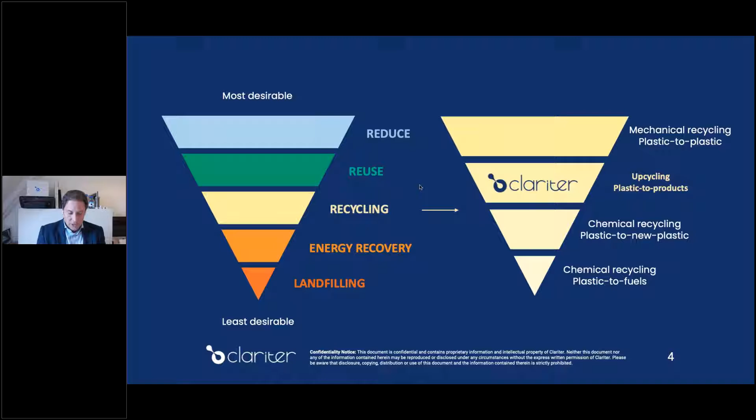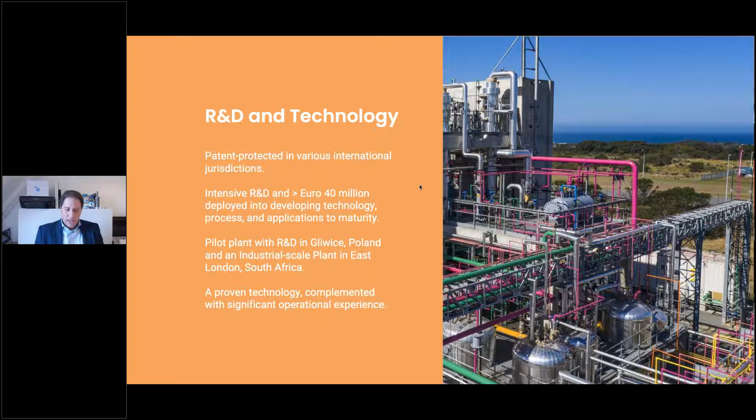Here we transform the plastic waste via a three-step process. First, we thermal crack it. Then we have a unique hydrorefinery process in which the pyrolysis oil is refined based on hydrogen, taking out the double bonds, the sulfurs, the aromatics, all the impurities. After that we distill it and separate it into three product families: solvents, oils, and waxes.

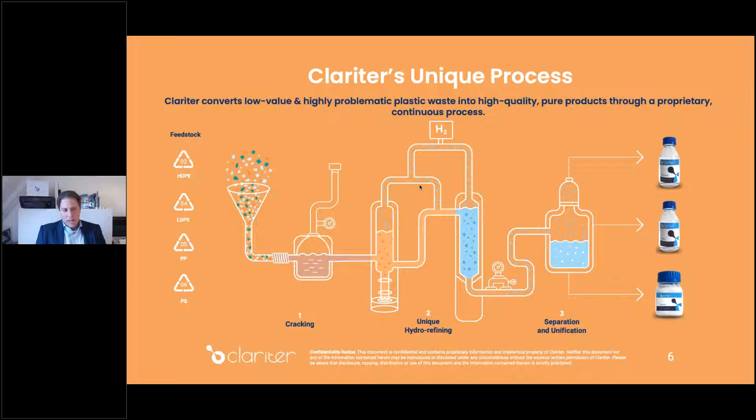This unique process creates products of the greatest, highest purity that can be used in numerous applications, whether it's shoe cream, lamp oil, surf wax—you name it. The opportunities are endless, because with high purity we achieve a 100% drop-in.

We create a 100% drop-in that can replace crude-based oil products, our incumbents for these products, making it much more sustainable. So all the products you see here in front of me, and behind me as well, are made out of plastic waste—upcycled plastic waste into these chemical products.

Our products have been tested over and over again. They meet FDA purity levels. We have reached registration in Europe, and currently, as you saw, with our pilot scale plant in South Africa, we're up for the next big phase in our existence: our full-scale plants.

We envision these first off in the Netherlands, Poland, and Israel. There we will process 60,000 tons of plastic waste and turn that into our beautiful product, yielding 50,000 tons. So basically we have a yield of 85%, which is very high in this field of work.

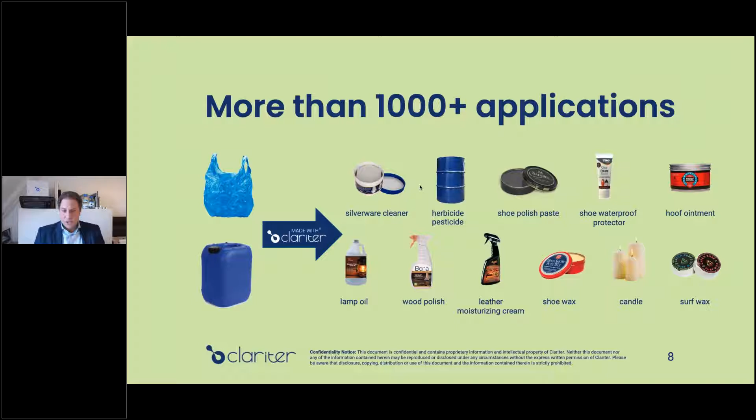And this all is a unique proposition we're very proud of.

As the Clariter family, I can tell you we are a very international company. I'm talking to you here from the Netherlands, but we have an R&D team in Poland, our team in Israel, and a team in South Africa. It's all patented, and we're always open for new partners, investigating new solutions and applications, and for people interested in joining us in our next steps for our full-scale plant.

So that's very short what we do, and again, we're very proud to be here as a finalist. Thank you for your attention. Thank you, Jasper.

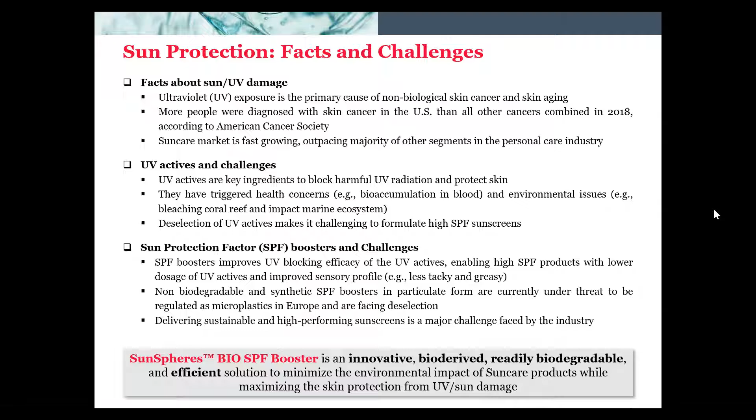Towards that, we developed this new product called the Bio SPF Booster. It is bio-derived from wood pulp, using a patented technology from wood hydrolysis. The wood is responsibly harvested. It has 100% renewable carbon, and is derived natural according to ISO 16128, with a natural origin index of 0.97. It is also readily biodegradable, confirmed by the OECD 301F test. This product has also been recognized by a few global awards, as you can see here.

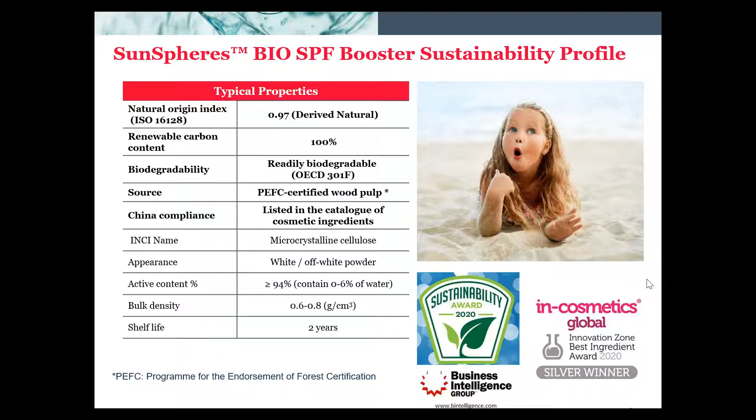Now, how it works. The scattering mechanism is through UV scattering. If you look at the illustration here, the scattering can increase the optical path length of those harmful UV light in the sunscreen film, which is acting as a protection film on our skin. And then it increases the probability of those harmful UV radiation being absorbed or consumed by the UV actives.

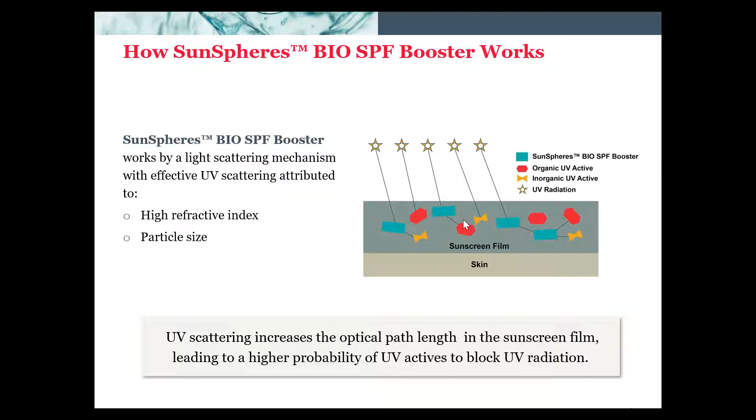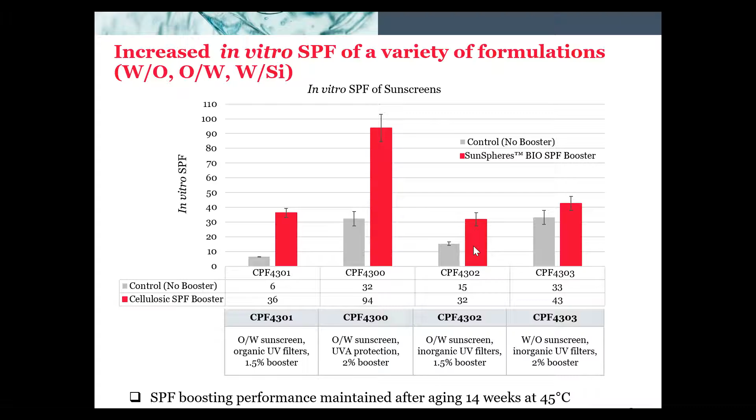We also did the in vivo test, done by a third party, directly testing on human body according to the FDA protocol. You can still see that this product in one of those formulation chassis doubled the boost efficiency of the leading synthetic benchmark. And that allows anywhere from 30 to 40% reduction of UV filters by only using 1% of this sustainable SPF booster.

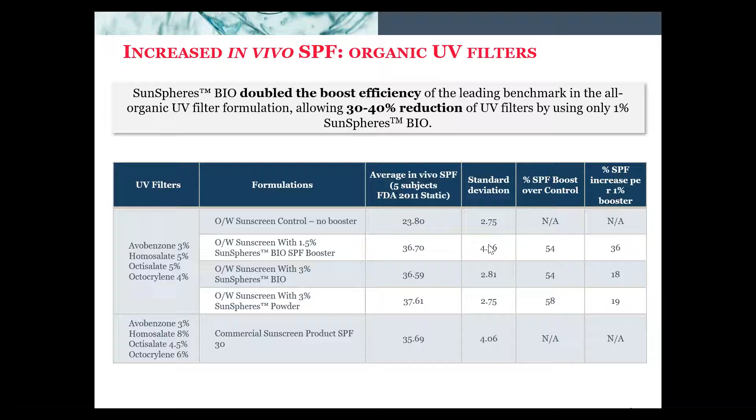And we also tested it in a different formulation, tested with all inorganic UV actives zinc oxide and titanium dioxide. If you look at the label at the back of the sunscreen bottle, again, we see a very significant boost of this product.

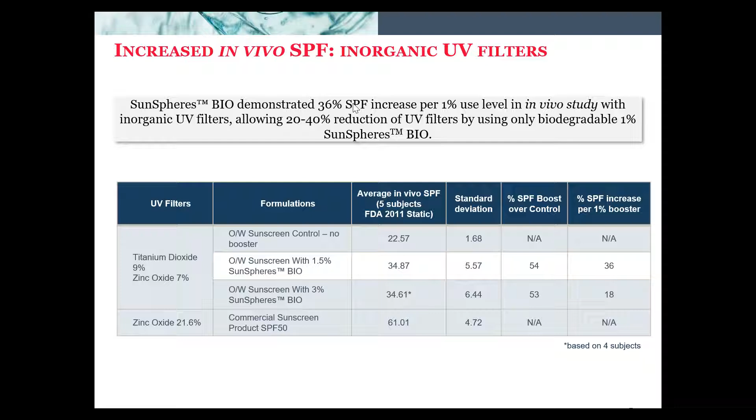One of the kind of drawbacks of sunscreen that discourages consumers from applying it to the skin is the sensory experience. This product shows to improve the sensorial profile of the sunscreen, making it less tacky and less greasy. This will help the consumer appeal as well.

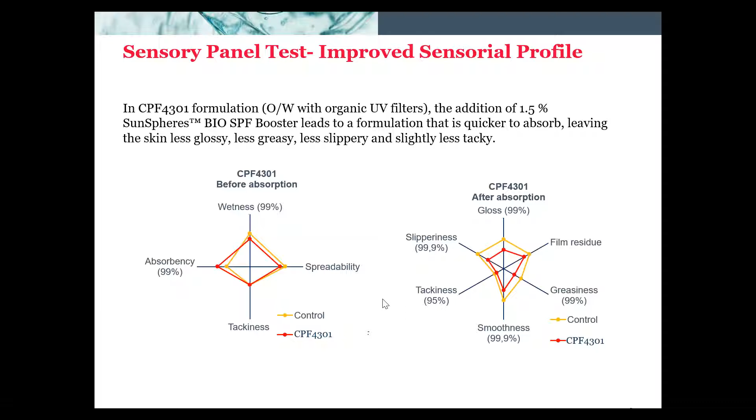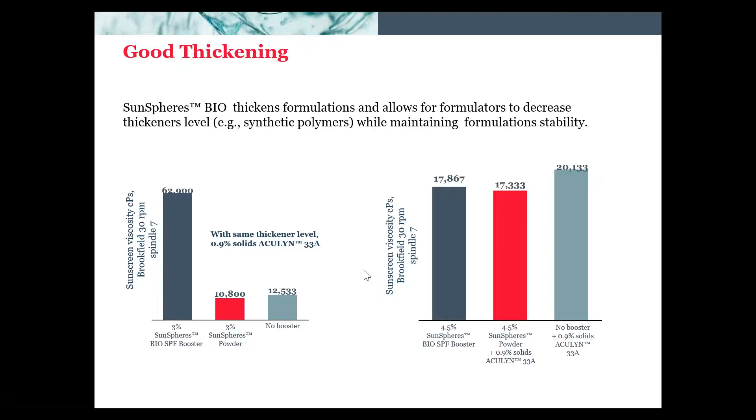In addition to the SPF boosting, this product also can thicken the water. This is an additional, added benefit compared to other SPF boosters. This allows this product to act as a rheology modifier and replace some of the synthetic or non-sustainable rheology modifiers in sun care products as well, like a 2-in-1 kind of product.

It was also found to have very superior shear thinning, as you can see here. There's a lot of technical detail I won't go into, but shear thinning is highly wanted in any consumer lotion-type application. It enables good spreadability and good sprayability through a pump spray.

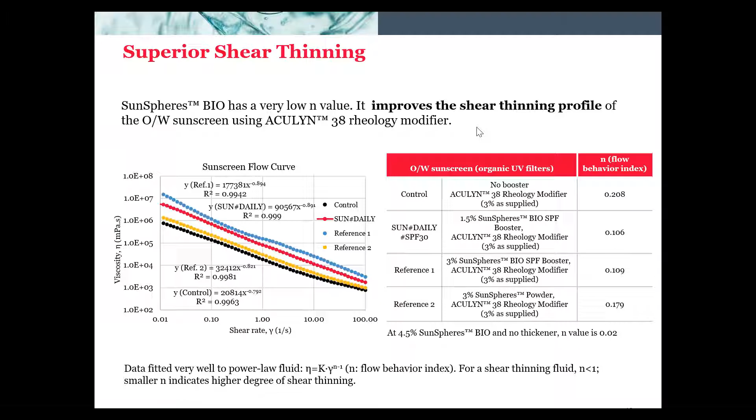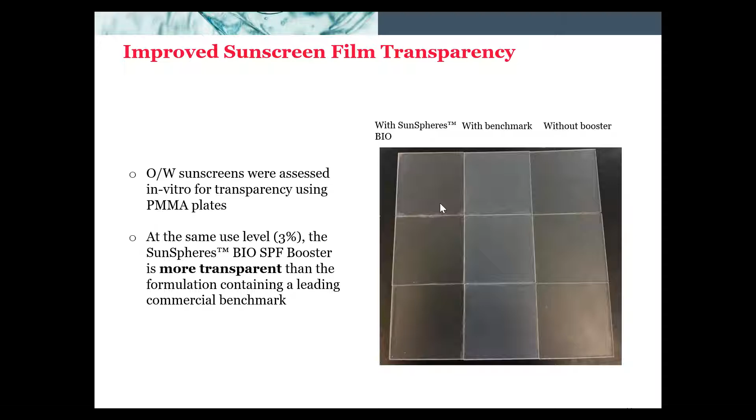Again, the last one is - usually with sunscreens, people don't want to look white after you put it on. So this product enables a transparent film on the skin.

So overall, this is a crystalline cellulose-based technology that has high performance and multifunction. It not only enables higher sun protection to help reduce non-melanoma skin cancer and skin aging, but also reduces the environmental and health impact of the sun care product overall.

And so with all that, I'd love to have you answer questions.

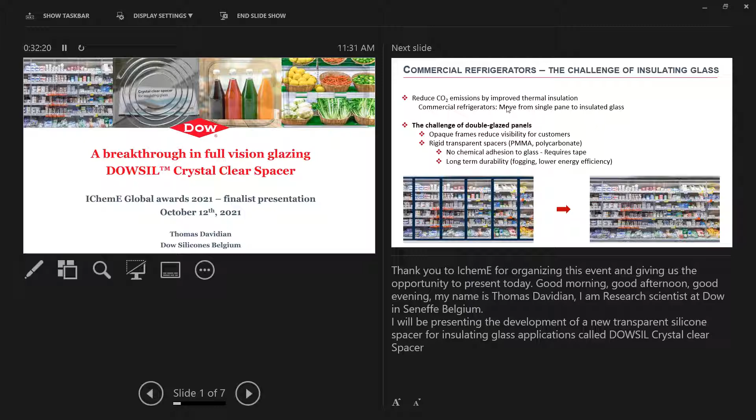Hello, good morning, this is Thomas. Can you see my full screen mode? I think, Thomas, you need to go to the top left of your screen and change the display settings. Yes, that's better now. Is it okay now? Yes, thank you. Okay, thank you, Mara.

Well, thank you to IChemE for organizing this event and giving us the opportunity to present today. Good morning, good afternoon, good evening to all. My name is Thomas Davidian. I am a research scientist at Dow in Seneffe in Belgium. I will be presenting the development of a new transparent silicone spacer for insulating glass applications, called Dowsil Crystal Clear Spacer.

In order to increase thermal efficiency and reduce CO2 emissions, supermarkets and retail stores look for improvements in the insulation of their commercial fridges. For some years now, supermarkets have equipped their fridges with single-pane plexiglass doors. However, the next step of thermal efficiency, meaning going to double glazed panels, shows some technical challenges. For supermarkets, it is critical to maintain full vision for the customer to see the goods, so opaque frames in aluminum or PVC cannot be used.

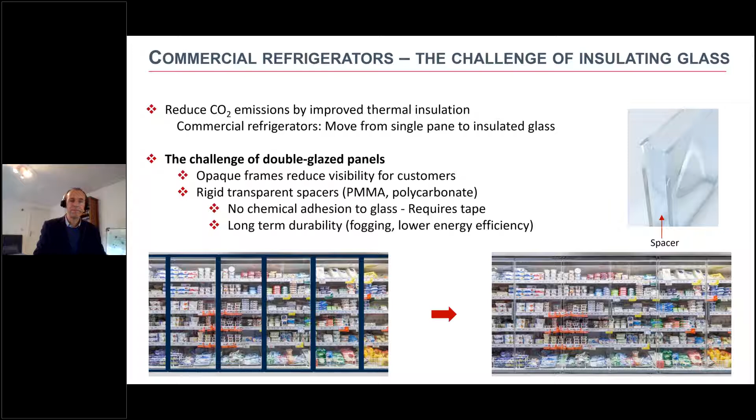Our team at Dow has developed a silicone spacer based on a novel two-part condensation cure chemistry. The formulation was optimized by balancing key properties such as transparency, hardness, elasticity, and adhesion to glass. Formulations were scaled up, and an on-purpose spacer production process was developed. This allowed us to sample customers with pre-shaped spacers and optimize the formulation based on their feedback.

Eventually, a two-component formulation called DOWSIL 2255, Part A and Part B, was selected. The resulting cured material is crystal clear with durable transparency. This new chemistry provides a unique property of chemical adhesion to glass, even when the spacer is fully cured. As you can see in the picture on the bottom left, there is strong adhesion of the spacer to the glass panes, also showing the good flexibility of the spacer.

Moreover, the lower thermal conductivity of the silicone material enables up to 4% improved thermal efficiency over doors made with PMMA spacers. Both the formulation and the production process have been patented for a robust insulating glass solution.

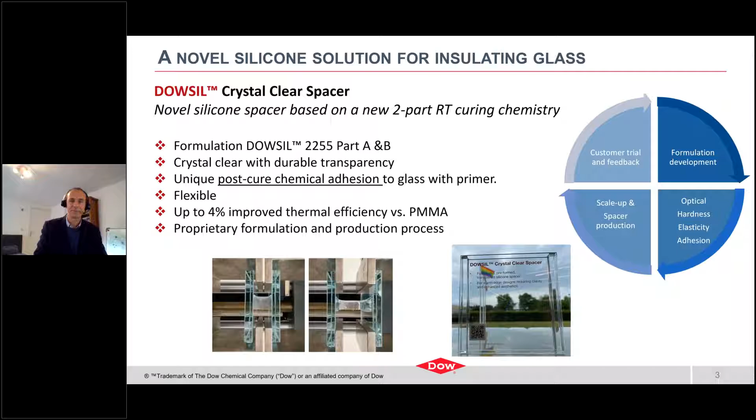The assembly process of the insulating glass units with our spacers is pretty straightforward. First, the glass panel needs to be cleaned and primed with the recommended primer, and left for 5 minutes for the primer to react with the glass. After that, the silicone spacer can be placed onto the glass on both sides and covered by the other pane. After 5 minutes, the spacer is chemically bonded to the glass. Eventually, a secondary seal can be added and the assembled panel can be moved to storage.

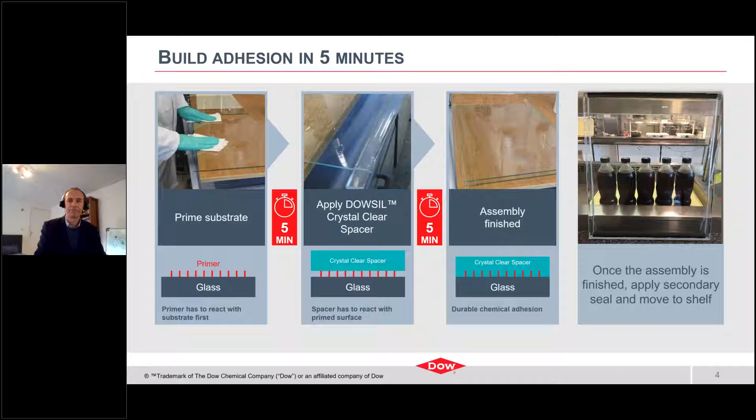The DOWSIL Crystal Clear Spacer is intended for air-filled insulating applications in commercial fridges. Its flexibility also allows the design of curved shapes for specific applications. The picture on the right shows a fridge in a supermarket equipped with our spacers, used to demonstrate the durability of the silicone solution. After several years in service, no loss of adhesion or fogging has been observed.

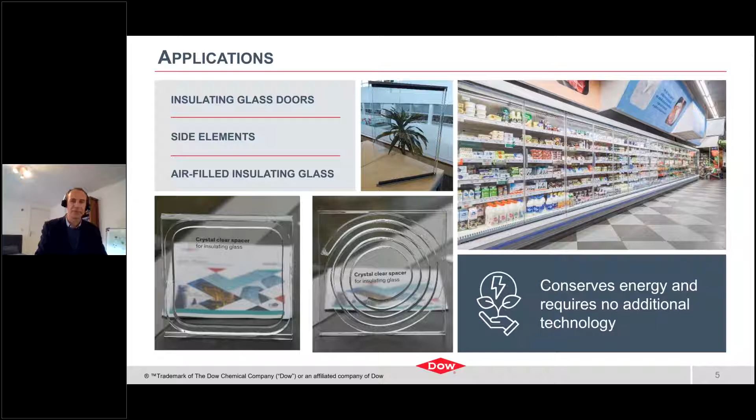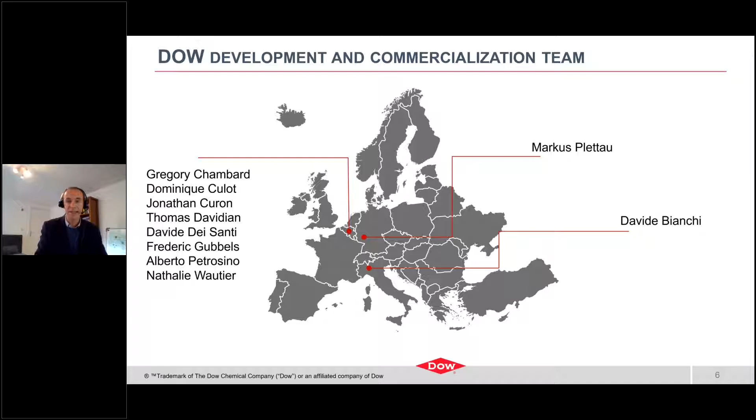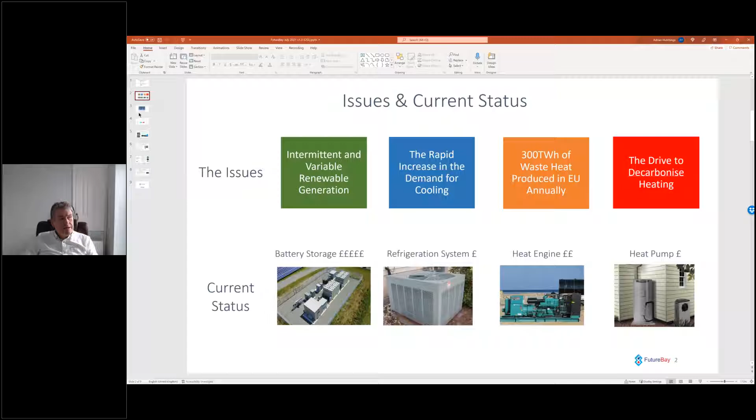There's also a drive to decarbonize heating, and almost as a side benefit of our system, we can provide space heating and domestic hot water. So the system we have produced, the FutureBay unit, can deliver long duration energy storage at quite low costs.

We can deliver waste heat to power, and we can deliver cooling and heating all from a single system, which is based on well understood refrigeration type equipment for easy installation, operation and maintenance.

So this system will not only enable us to shift loads from peak requirement times to off-peak times, and allow us to use renewable energy when wind isn't blowing or the sun isn't shining, but we can also reduce energy consumption for the provision of cooling and heating, and we can do it in a very inherently safe, non-toxic and environmentally benign manner.

So let's talk about this new cycle. This is patented—we have 2 patent families covering over 100 inventive steps, and those patents have now been granted on a global basis. At the center of the system, we have a heat pump, which is energized by low-cost off-peak renewable energy.

And that creates two thermal stores. Effectively, the same as any heat pump, you're moving heat from one side to the other. So we create a cold store in water and we create a hot store in water.

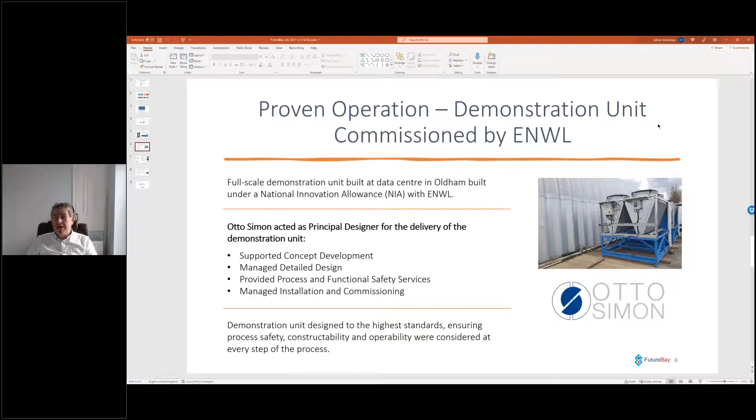I won't speak for Otto Simon - this is their background, they are a highly professional, very skillful team. What I would say about them from the customer side is they're extremely good at communicating, both reactively and proactively, which is great - you don't have to wait to find out what's happening. But I think the other thing that's been really surprising for us is that they're extremely passionate about this project. They believe, as we do, in the benefits it can bring and the importance of it, and that passion comes across in the work they do with us.

The project, as I say, was very successful. This is extracts from a report that Electricity North West made to Ofgem on completion. What we can see here is that we can reduce net electricity consumption as we take the heat that would have been wasted. We reduce CO2 emissions by using electricity that would be produced at night time with lower CO2 burden, and we reduce peaks on their network by producing power that would have normally been used during peak time.

We could effectively reduce, in this particular application, the air conditioning consumption by up to 50%. And we shifted the load off their network, which was extremely important to them, by 150%, because we took the load that would have been used during peak hours and shifted it to off-peak, and we produced electricity during that peak time as we delivered the cooling.

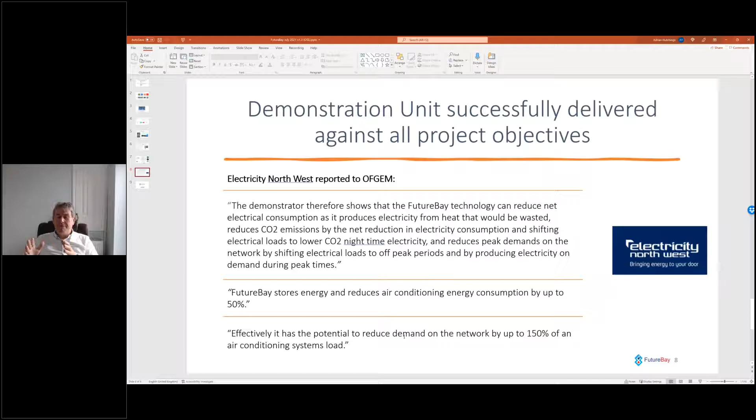So that's the FutureBay system and the work we've done with Otto Simon. We're currently now looking at doing some more projects, and would very much welcome talking to people if they've got ideas for this application. So if there are any questions, I'm happy to take them.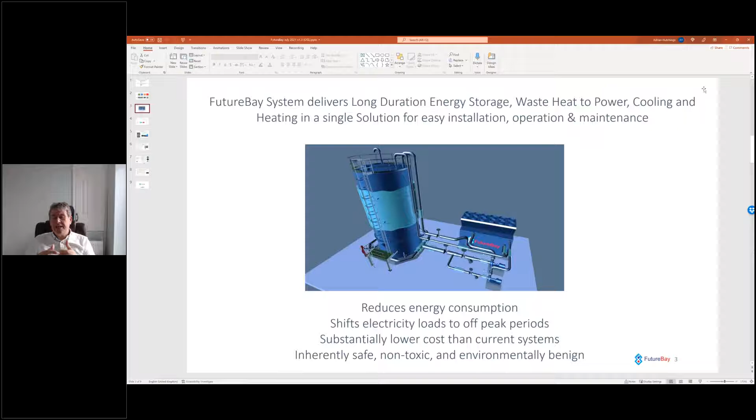You're using waste heat. Is enough energy really available? What temperature might be needed, please? We can operate down to 50 degrees C. I think if we would normally operate at around 90, it's very efficient for us. We don't need to have the waste heat because we're actually taking our own waste heat. When you operate the heat pump, you are effectively using heat here, so we can actually take ambient as our material to be warmed.

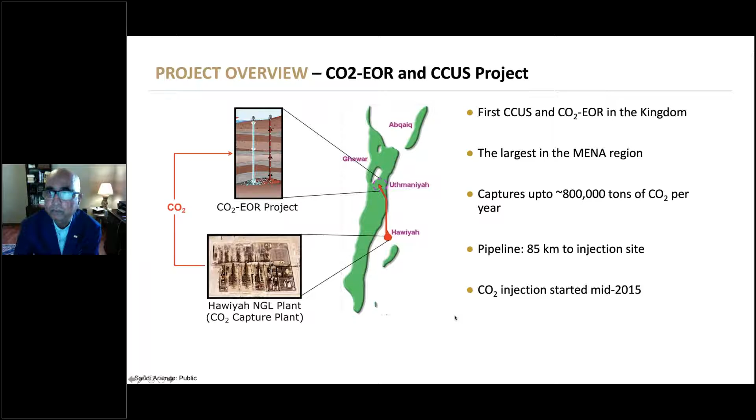There's a pipeline about 85 kilometers, and then it is injected into that reservoir, which is the Arab-D, the main reservoir from which 4 to 5 million barrels of oil come every day. Here are some of the project details. There are two major components for this project: surface, which includes the CO2 capture, dehydration, and compression facility, and subsurface, which includes the injection and production facilities.

So the project has 4 injectors, 4 producers, and 2 observation wells, and these were all designed and built specifically for this project. The wells are all equipped with downhole sensors, measurement devices, and automated valves, so we can look at the data real time, almost real time, on our computers and desktops. The project has become a test bed for deployment of Generation 2 intelligent field technology. The bottom part of the slide shows you the timeline for this project, and I want to emphasize that this project initially started in 2006. CO2 injection started in 2015, and we are still ongoing with this project.

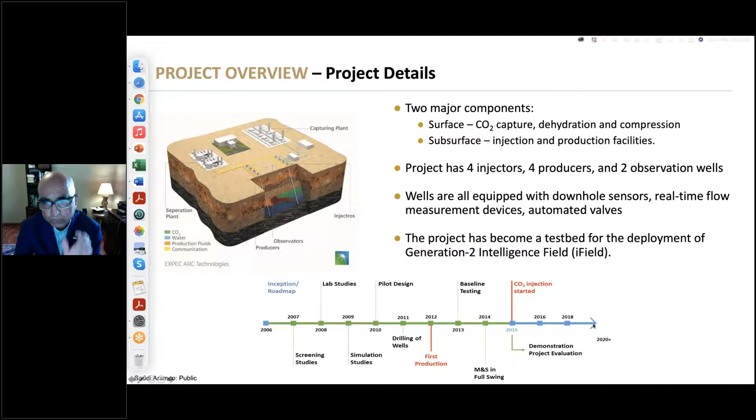Just to give you a time scale of a project like this, so when you hear in the media that CCUS is going to be a solution, remember it takes time.

Okay, so here is the actual data, starting in February 2012, before CO2 injection started. You see a general decline. CO2 injection started in 2015. The green is the oil, red is the amount of CO2 injected, and brown or orange is the gas produced. On top you see in blue what we call water cut. You can see that the green curve increased after we started injecting CO2, and it has been hovering around a significant amount, much higher than what we were getting with the water case.

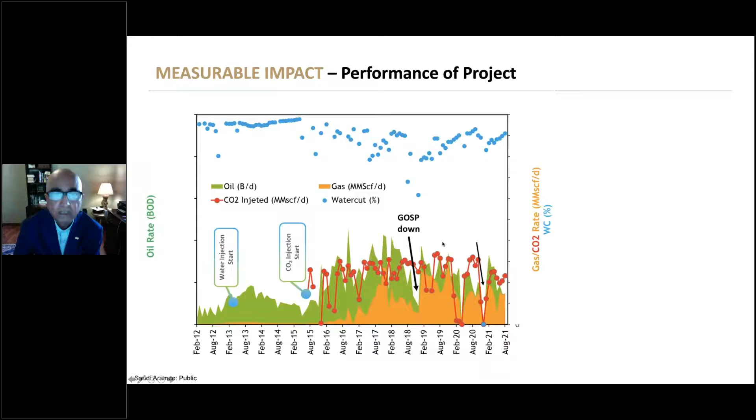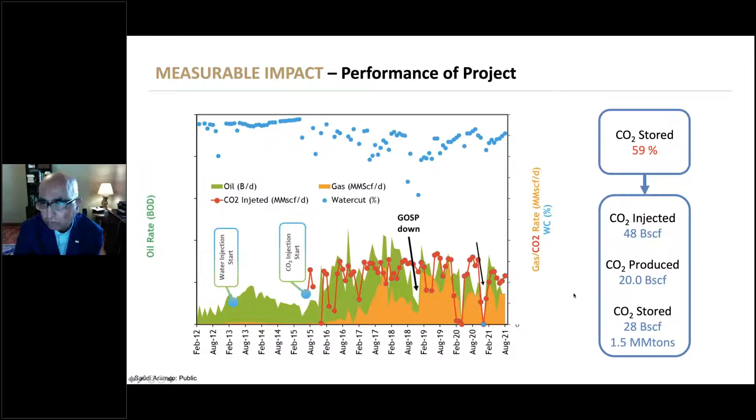In terms of the big picture, whatever amount of CO2 we have injected, shown here, is 48 billion standard cubic feet. Of that, we have produced back 20 billion standard cubic feet of CO2, and therefore the CO2 stored is about 28 billion standard cubic feet, which amounts to about 1.5 million tons. This is the actual amount of CO2 that has been taken out of the atmosphere and put back into the reservoir.

So in terms of our objectives, which was to sequester the CO2, 28 billion scf has been sequestered so far, and the project is still continuing. We have had some positive gains for oil, and there has been an increase in recovery. We have deployed a lot of technology, leaving no stone unturned in terms of new technologies, some for the first time in the Middle East, some for the first time even in the world. Right now we're in the process of assessing the results, which has been extremely positive, and writing a report.

In terms of the numbers, this is the first CCUS project in the greater Middle East, North Africa region. Oil response has been very good, increasing by about 4 times the water flooding rate. About 59 to 60% of the CO2 injected is retained in the reservoir. We are injecting 2,000 tons of CO2 per day, which is equivalent to removing 170,000 cars from the road per year. So it's really a win-win project, a win for the environment and a win for getting additional oil recovery.

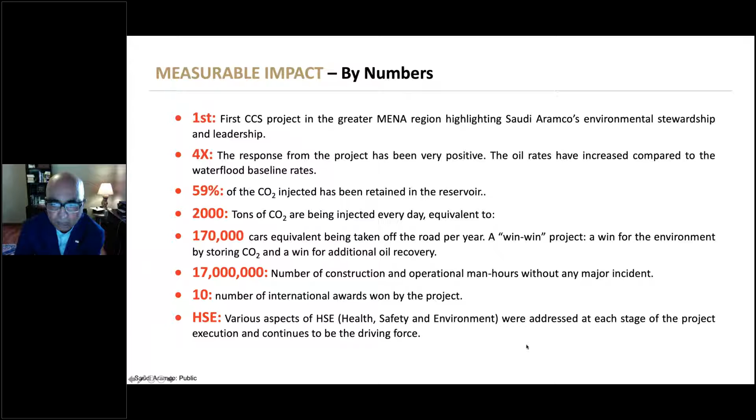It has been a safe project, 17 million hours without any major incident, and 10 international awards won by the project, prestigious awards, I would say. In terms of HSE, we have addressed all aspects of health, safety, and environment at each stage of the pilot implementation. We are doing a superb job, in my opinion, in terms of monitoring and surveillance.

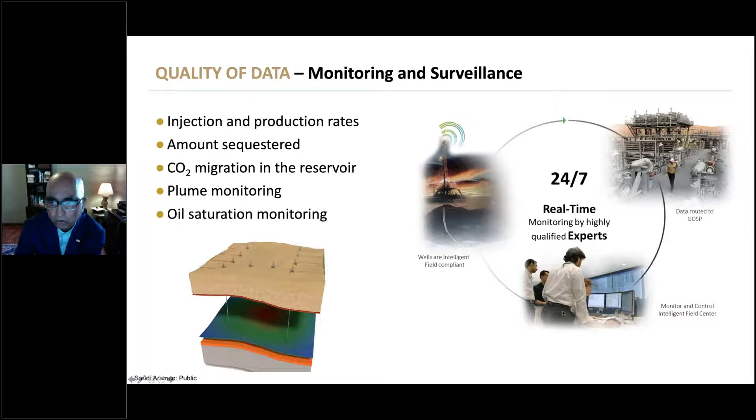We are monitoring the amount of CO2 going in, the production rates from the wells, and from there we calculate the amount sequestered. We are also monitoring CO2 inside the reservoir. We have deployed seismic, tracers, and advanced logging techniques, so we are monitoring the plume within the reservoir, and also, very importantly, oil saturation monitoring. It's almost real time, and all the wells are intelligent, instrumented with state-of-the-art sensors. The data is sent to the GOSP, and then routed to our desktops.

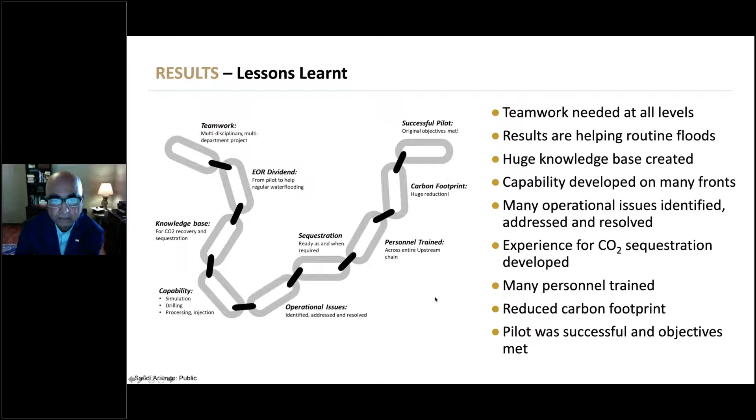So in summary, the results have been very positive. We had two main objectives: to sequester CO2 and to reduce the emissions, and both of them have been met. The project is still going on, and we have acquired a lot of knowledge and experience for CO2 sequestration.

In terms of monitoring and surveillance, that has been the strong point of this whole project, with some world firsts, some Middle East firsts, and we have learned a lot of lessons. We know that CO2 works, and it will lead to sequestration of CO2.

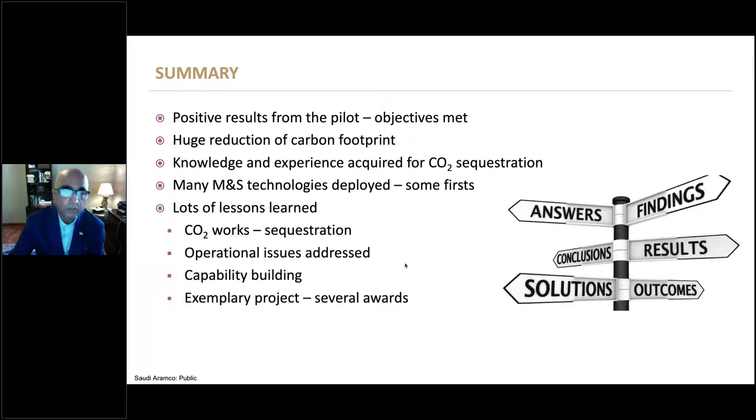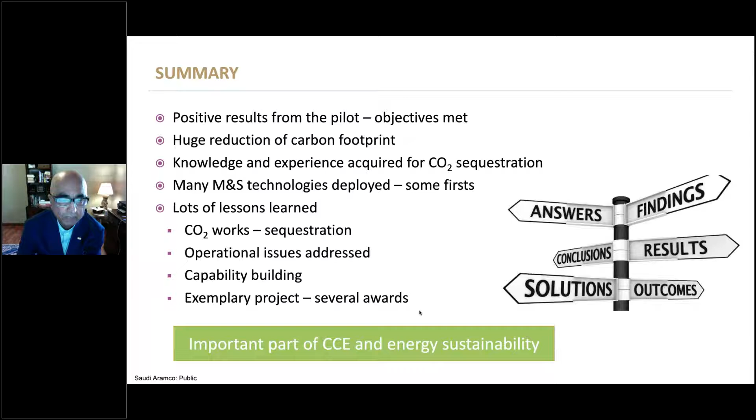Many operational issues, obviously, any such project will have. Those were addressed. We have developed our capability, and it has been an exemplary project, a recipient of several international awards. This project is also part of the circular carbon economy and energy sustainability initiative within Saudi Aramco.

This last slide takes you through a journey of the whole project through pictures. So you see the CO2 compressor facility or compartment - it's a massive compressor. And then the pipeline and the trunk line and the other facilities associated with this. So with that, thank you very much, and I'm open to questions.

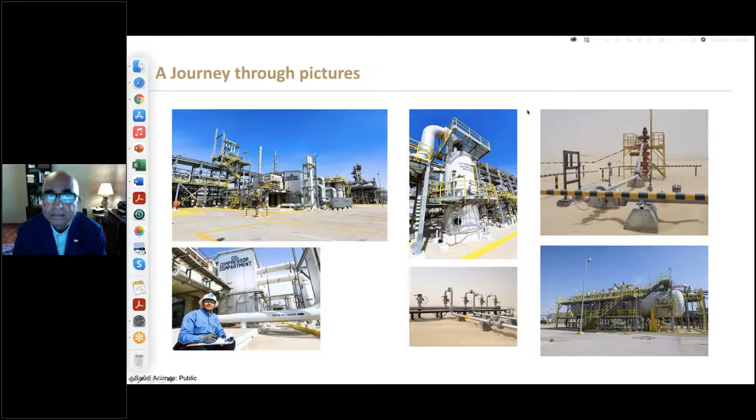What kind of technology is adopted to be called as world's first?

One of the things that we have deployed for the first time in this project is the seismic application. For the entire pilot area, we drilled about 1,000 holes, at a depth of about 50 to 100 feet below the surface, and we placed seismic sensors there. Then we had vibrators going around the whole pilot area, thumping the ground, to monitor where the CO2 was going inside the reservoir. This seismic application of monitoring a CO2 migration or plume is the first time in the world that has been done, to our knowledge. That's just one example - there are many, we've deployed 22, and there are many more I can talk about.

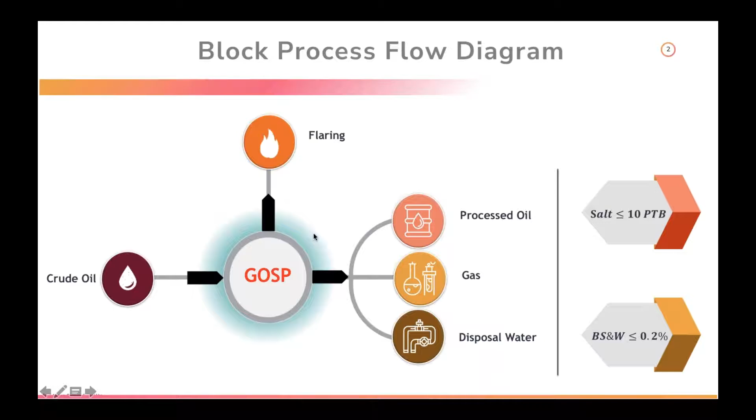One universal key performance indicator used to gauge energy performance is energy intensity. For the GOSPs, energy intensity can be defined as the power consumption to the amount of useful product, meaning oil and gas. The produced water, on the other hand, is excluded, which represents a big challenge. However, the innovative energy management program we have implemented has helped us achieve a marvelous improvement that reduced the GOSP's energy intensity in spite of this challenge.

Looking at the equation here, to reduce energy intensity we either need to reduce our power consumption or increase our production rate. Now I'll walk you through the main optimization tools and initiatives that our energy management program has adopted to reduce energy intensity.

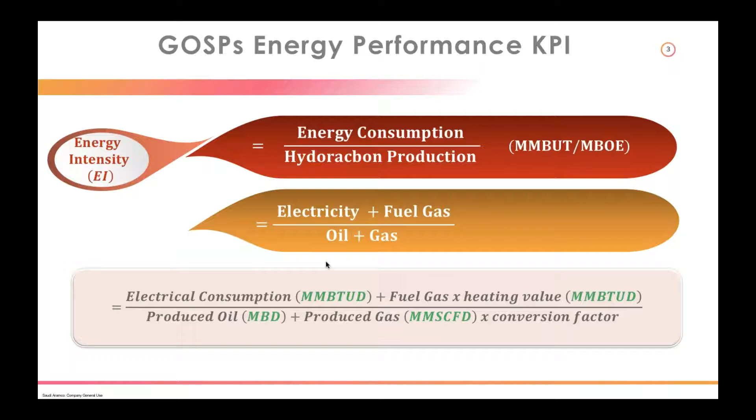The first initiative is Aramco Invented, a mathematical algorithm using GAMS software. This model easily and quickly identifies the optimum mode to produce the monthly oil target from the 14 facilities my department operates. To have it oversimplified, it tells us to increase production from plant A and decrease production at plant B to reduce the number of operated pumps and compressors.

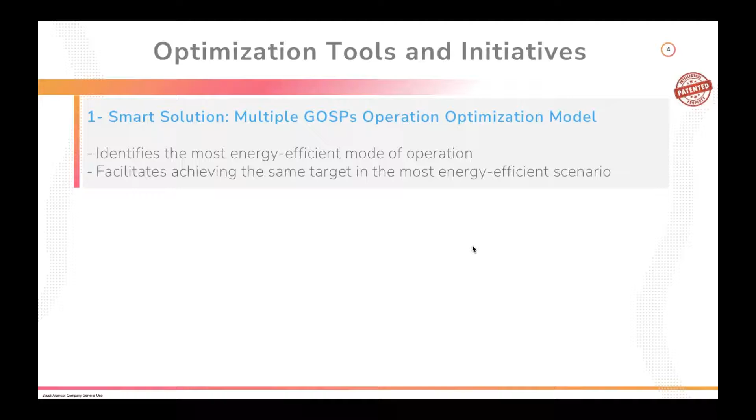In summary, the mathematical algorithm we invented supervises the operation of our 14 facilities by reviewing process parameters and predicting the most energy efficient mode of operation. Armed with this algorithm and the swing lines network, our energy consumption density has been reduced beyond expectations last year. Consequently, the energy intensity has been reduced.

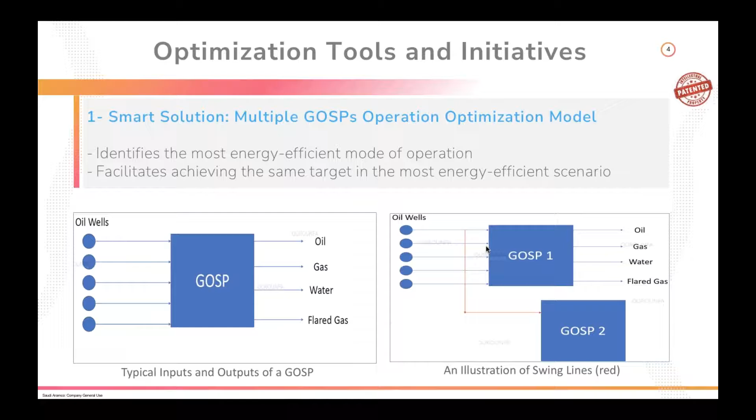As we've established, another way to reduce energy intensity is increasing production, which takes me to the second tool our energy management program has, also Aramco Invented. This one is to revive dead oil wells, consequently increasing hydrocarbon production. The beauty of this invention is that it increases hydrocarbon production without any increase in energy consumption by utilizing an ejector, leaving a bigger positive impact on energy intensity.

For ejectors to work, they need two inputs: first, a motive source or high pressure source, and a low pressure source. In our oil wells reviving system, the motive source of the ejector is the pumped processed oil leaving the GOSP. On the other hand, the low pressure source is the dead well. The output of the ejector is then an intermediate pressure mixture that is processed at the GOSP.

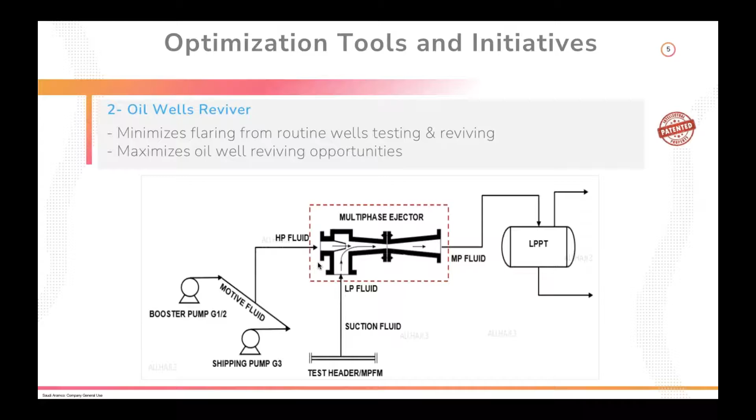Unlike the conventional practice to revive oil wells through the high pressure test trap, which is a pressure vessel inside the GOSP, the ejector eliminates gas flaring entirely. In addition, it has a higher reviving capability due to the higher differential pressure obtained from the shipped crude oil compared to the conventional practice. Hence, once again, maximized production and minimized energy intensity are achieved.

The high pressure source is from the water injection pumps. The resulting intermediate pressure mixture is then returned to the plant, and hence flaring is entirely eliminated. The otherwise flared gas is reproduced, production is increased, and energy intensity is reduced.

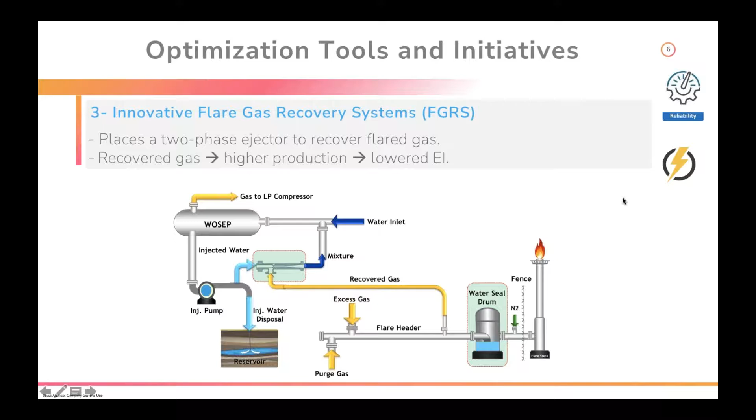The last tool our energy management program has is the effective monitoring of the total power consumption in general and the significant energy users' performance in particular at our facilities. This has been accomplished by state-of-the-art dashboards that provide real-time data of the significant energy users at our facilities, ensuring power consumption is optimized by avoiding unnecessary equipment operation.

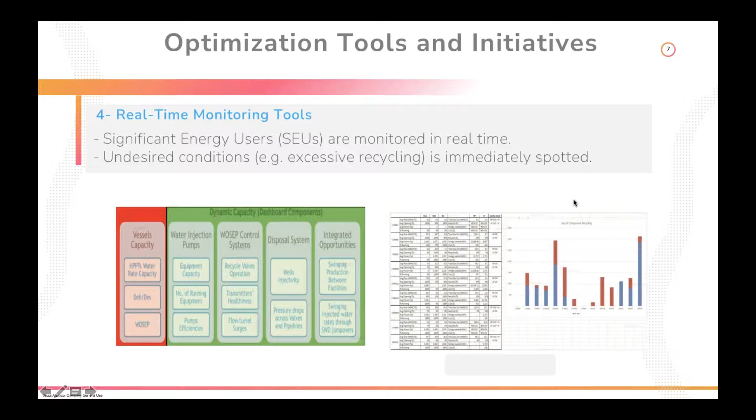In summary, the energy intensity improvement has been achieved in spite of major challenges we had. The success of our energy management program led to improving the energy intensity at our 14 facilities by 6.4% in 2019. In 2020, a further improvement was also achieved by 4%. This is of great importance to continuous energy efficiency improvement and for us to protect the environment.